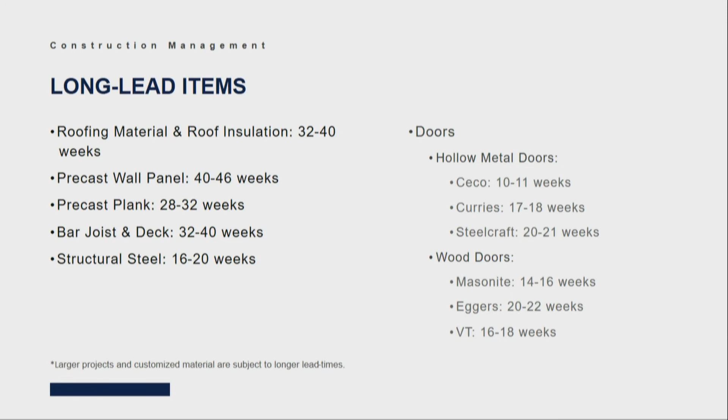All right, go ahead. So GMP, what is a GMP? That term gets floated out there a few times. GMP stands for Guaranteed Maximum Price. At some point in this process, you are going to want to lock into a guaranteed maximum price. When can that be provided? Typically, we see that it is established after the bidding period.

Again, if you wanted to lock a construction manager at risk up, say 50% of the way through design, you can certainly do that, and we can provide a guaranteed maximum price at that point. Again, to protect ourselves, you will just have a higher contingency factor on that number. So unless there is a rhyme or reason to absolutely lock in earlier than design being 100% complete, we typically see it after all bidding is done, all the scopes are vetted out, and we agree on who all the subcontractors and suppliers are going to be.

So Paul, you're just going to talk quick milestone schedule?

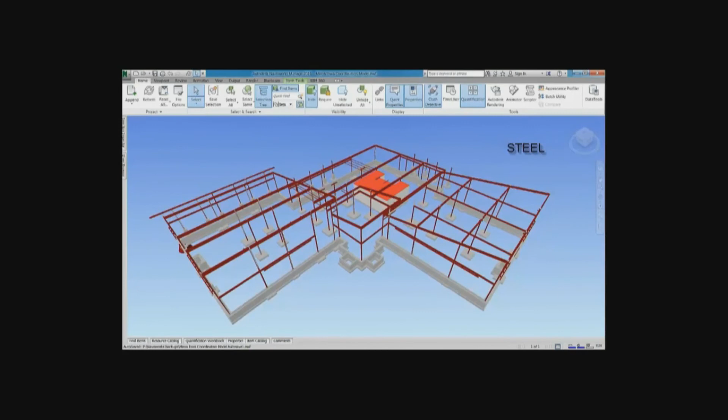And we're going to move on to what's called Building Information Modeling. In our industry, it's called BIM. I'm showing you a video right now, and I want you to pay attention to the upper right-hand corner. By having us involved in the design process early on, we will build this facility virtually throughout the design process.

As you can see, it is a layered process - each layer of this facility. This is an actual project that we did in Iowa, not a model. And one of the things this features is a feature called clash detection.

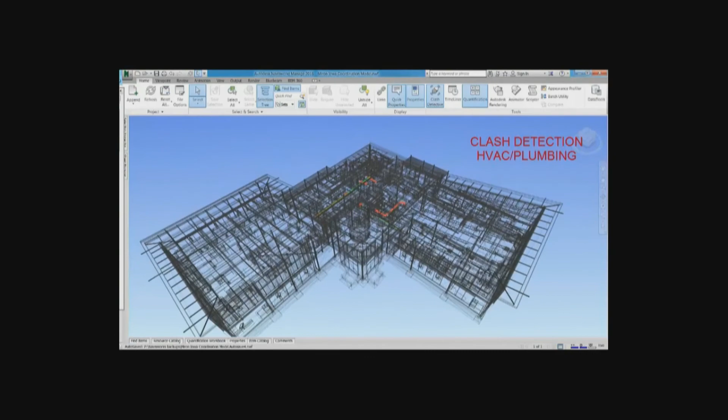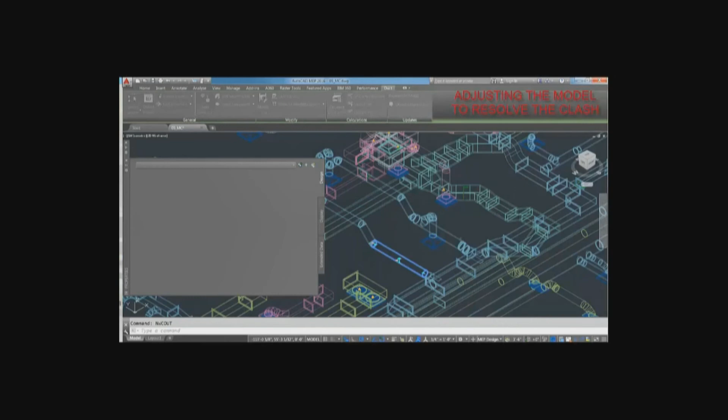As you can see in this model of actual plans, the plumbing and the HVAC are not playing well in the sandbox together. Now what this would result in, in most cases, is a change order, and nothing will destroy a budget faster than change orders. Working in collaboration with our architectural partner, we will make the adjustments and resolve the clash. We will check the ceiling height to make sure there are no other obstructions, and we find out that there are not, and we're able to move on.

So with our collaboration, using BIM or Building Information Modeling, we can also take a satellite image of your work area. This is extraordinarily important to us, our team, and all the subcontractors that will be on site. We'll provide a site logistics plan - you can see on the left-hand side everything that it will do.

For us, the most important things are safe traffic flow. We need to know how these large cranes and all this heavy equipment will be delivered safely. We also need to know how the structural steel - there's going to be tons of steel delivered in large quantities - how we're going to move those across the job site safely, and what is called a laydown area. These trucks come in with the steel, and we have to unload it and put it in an area that's safe and secure.

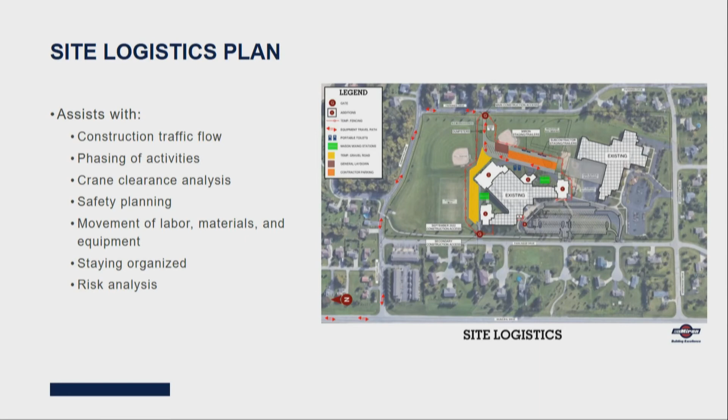So with that, we would like to turn it over to questions and answers, and that means Dan's back on.

The one thing I can add that Paul didn't touch on is through this pre-construction phase you saw the site logistics plan, whatever we do on the building information modeling, we provide a very thorough schedule. All of that is in preparation to send out bid packages for people to bid on. Our job is to make that bid package extremely black and white, to make sure everyone knows specifically - the electrical contractor, when do I need to be on site? When is my scope supposed to start and finish? That's our job. As soon as you get gray into the mix, contractors add costs because it's unknown. So again, construction management at risk, that is what you're hiring us to do - make it very black and white and hopefully drive a lot of costs out of the project.

So with that, any questions? Anybody have any questions? I know Scott and Mary, for sure, you were on the committee that approved them.

So I would just say after this presentation that I just heard, it really seems like a slam dunk because we just don't have that expertise. And the money we're spending on this project, we want to make it a good bang for our buck and don't want any change orders. This is just, I think, absolutely the way to go.